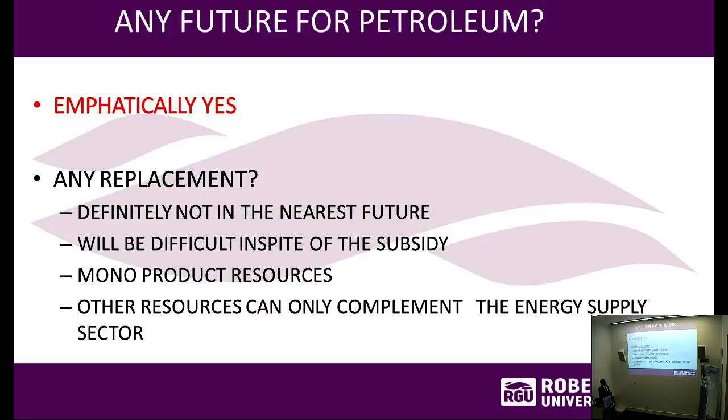Is there any future for petroleum? Honestly, the answer is emphatically yes. It's the only one that has a future - the others are being subsidized. And we still need them, they need to be able to complement, not supplement, those key areas. But the key part is the subsidy may dry out, but more importantly, petroleum actually has a lot of other products that we rely on.

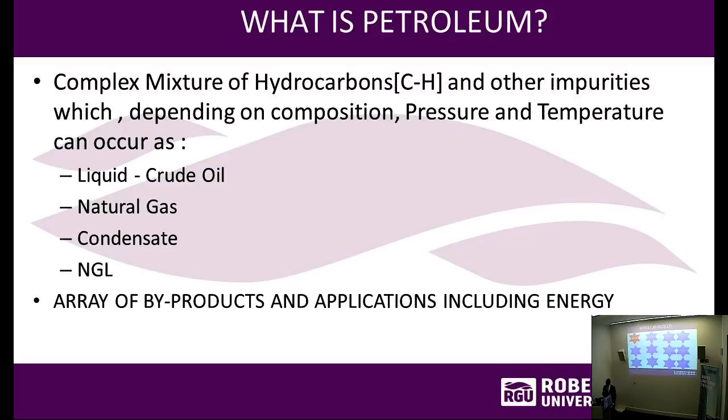I want to start by giving the definition of that. It's actually a complex mixture of hydrocarbons. At the end of the day, it can occur as liquid, which we call crude oil, it can occur as natural gas, and of course you can have condensate, natural gas liquids, and it has an array of byproducts - just too many, at my last count I think there are at least 500. Like I said, literally everything in this room is a byproduct. As we develop and advance, there's a need to be able to enhance what we do, and that's where they're coming from. Energy is just one of them.

When people are condemning petroleum and say we should leave them in the ground, it's only energy they are emphasizing. But they need the roads, they need the clothes they have to wear - they all come from petroleum. So these are some of the challenges we face. Can we cut our face to spite it? I'm not here to talk about politics - we in academia, politicians are elected to take decisions as far as political decisions are concerned. But we have a responsibility to give them informed facts on the basis of which they can make their judgment, and that's one of the areas I'm going to be talking about.

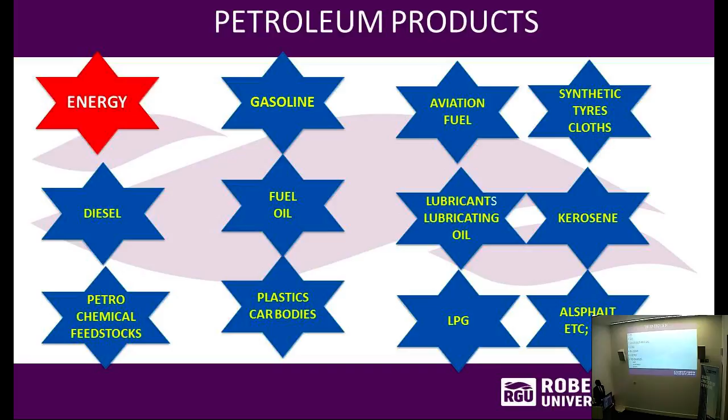So the shale gas is one of that. There's a decline in the North Sea, and you will see later - well, like I said, it's only just 40%. Is there still hope for the North Sea? Definitely yes, but it will take more technology. I'll call the shale gas and oil the low-hanging fruits. Scotland will be in an energy crisis in 10 years' time if we don't handle those low-hanging fruits.

So we will be - the era of cheap oil import or gas import is gone. I can tell you right now, as I'm speaking, every marginal field operator in Nigeria is building a refinery. Nigeria is 140 million - in 10 years' time, Nigeria will be importing oil as well, not exporting. We get most of our LNG from Nigeria right now; we will not have that. So can we take care of the low-hanging fruit?

My answer is yes. At the end of the day, I'm happy that the government has actually come to allowing us to have a public discussion and debate about this. But we in the university have a responsibility to at least show the government what the economic risks are, what the technical risks are, and then they can take decisions - that's not for us to do. So these are some of the key issues that come into play, and there's room for all of these others.

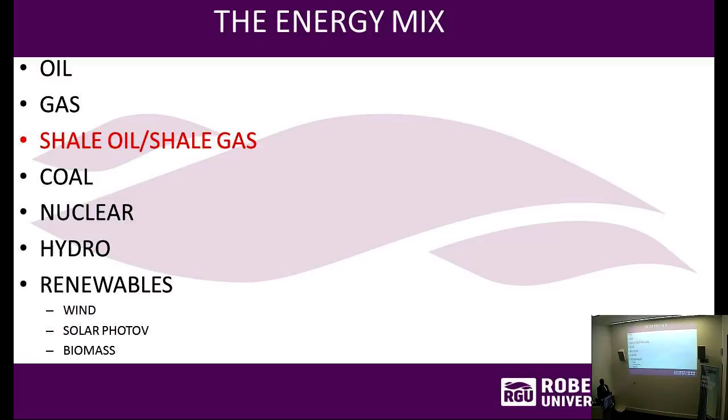The nuclear, we know what it is - I think it's already on its way out in Scotland. And the hydro is going on. The wind, of course, from Scotland's point of view, I think that's been the main kid on the block. And there are others - so these are the energy mix, but these ones here will continue to lead, and I want to show some key examples of that.

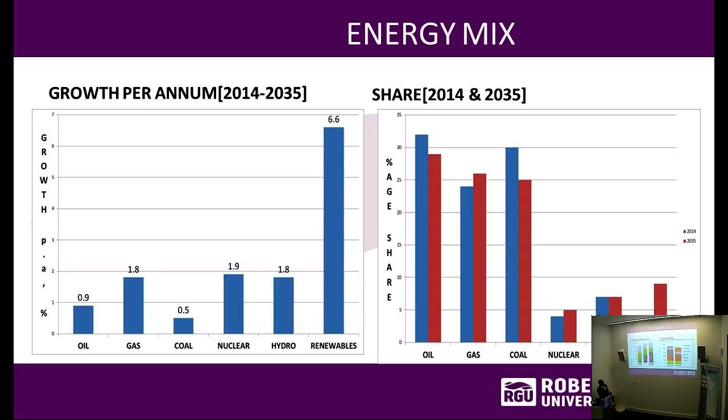And this is just for the 10-year period. Looking at this, there's no doubt there's continuing growth in China and all the areas that are now emerging nations, I like to call them. Generally we are already conserving as far as hydrocarbons are concerned, but you can see that oil and gas together are still going to continue to be leaders. In 10 years' time, there's an overall reduction, and that's part of what is contributing to an increase in the gap between demand and supply. That's a threat to all of us.

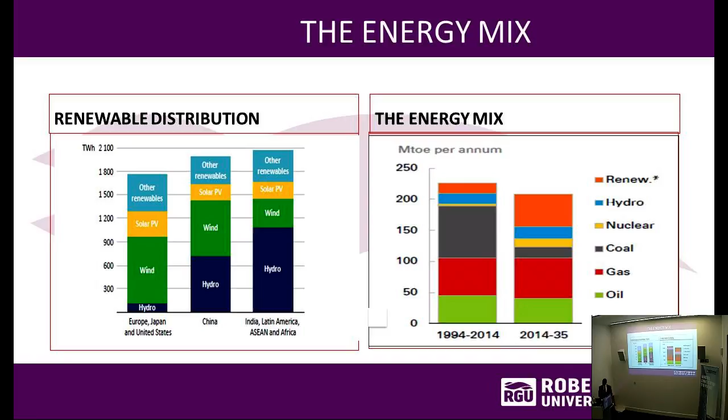Part of the reason is this: these countries, like I said, Nigeria, India, China, even they alone can consume everything that the whole world is producing. If, for example, China is allowed middle-class family having 2 cars, there will be 2 billion cars in China. That will consume everything that we have right now. So we have a serious challenge.

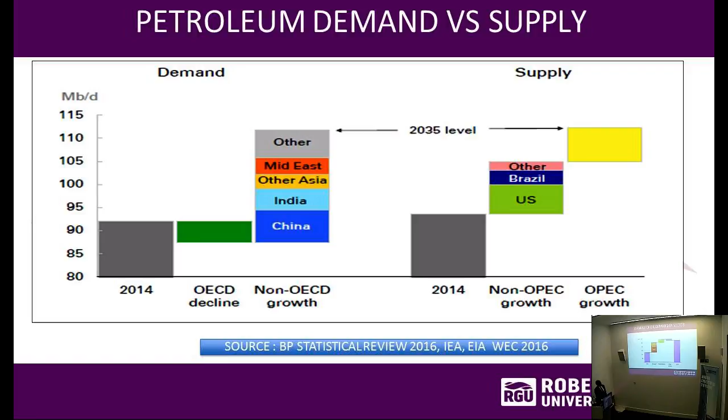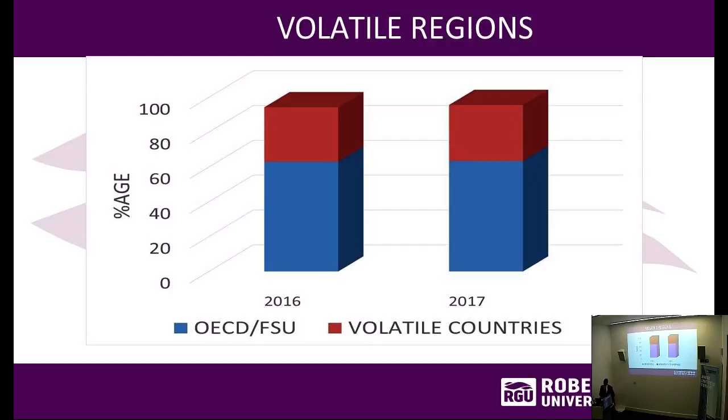I want to just quickly go into this part. At the end of the day, if you look at these scenarios here, I call them volatile countries. They're so unstable, anything can happen. In Nigeria, for example, partly on a daily basis, the export pipeline is blown up. There's war in the Middle East. So if we lose some of that, then that becomes a very serious challenge for us to fill that gap.

But having said that, like I said before, in Nigeria, for example, there has been a loss of export because 40% of Nigerian crude and gas used to go to the US. They are now self-sufficient, and that's what has forced the inward thinking. Last year it's already a policy, and all the marginal field operators are building refineries, and even the old refineries that have been defunct, the government is investing in them. The biggest petrochemical plant as of 2016 is in Nigeria. It's a $10 billion project. And there's also a $20 billion gas pipeline network.

So in 10 years, they might even be importing crude and gas. That's a challenge for all of us. But it's an opportunity for them. But that will eat into the gap within the system.

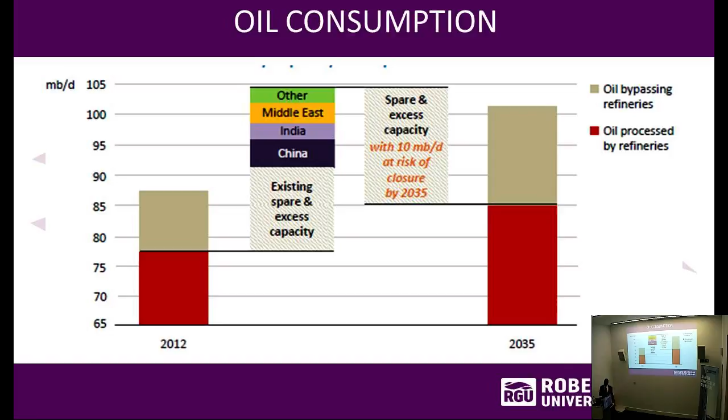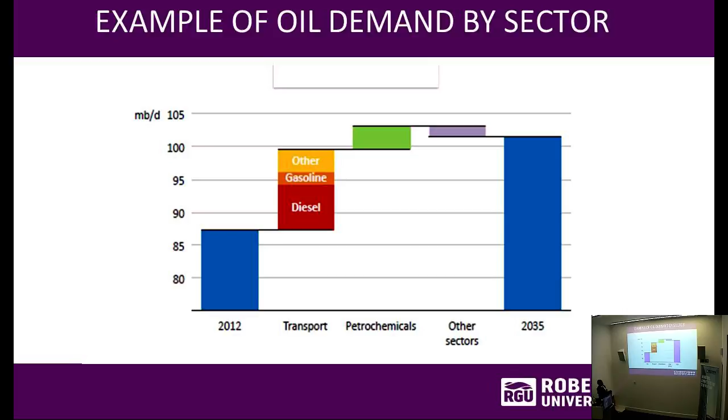So with the refineries increasing and all these countries developing, the 2 countries now with the higher GDP rise are China and India. And it may surprise many of you, and many of the other African countries are following that same process - they are net importers. If we take this a little bit further, we continue to see increase in the gasoline and the diesel and many of the others that we are getting. By 2035, unless some of these actually fill those gaps, that's where the problems come from.

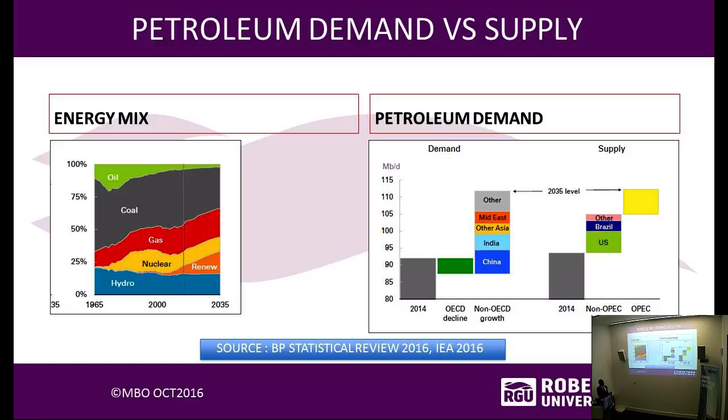I'd like to see more of the renewable, but the trend of the increase is so minimal. The impact right now is difficult. When there's no wind in Scotland, we've got a problem - the wind farms will not survive. Does that mean we shouldn't encourage them? Of course we have to. But we are downgrading the nuclear, while more of that gas is where the opportunities actually come from. And likewise, when it comes to the North Sea.

So in summary on that, it's the demand factors because of the economic growth in China, India, and especially Nigeria. The energy security in the US as well. And of course, like I showed before, the unstable exporting countries like in OPEC. But many of these countries, again, that are exporters now are going to be net importers. So they eat into that same pot. But we are having an increasing amount of mature assets and the low recovery factor of the 40% that I talked about earlier.

And you can see the trends here. The OECD, or the so-called developed countries, are already flattening out, but you can see the growth in all of the others. The GDP, the wealth creation, is part of what is actually some of the reasons behind that. That's where petroleum becomes a very important part of the mix. And we have to deal with that - for security, we have to ensure that these countries also remain stable.

From any angle that we look at it, I brought this deliberately, giving credit to my daughter. She claimed that we create most of the footprint. And these questions are questionable, or these data sets that have been bandied around. This is the greenhouse gas relationship.

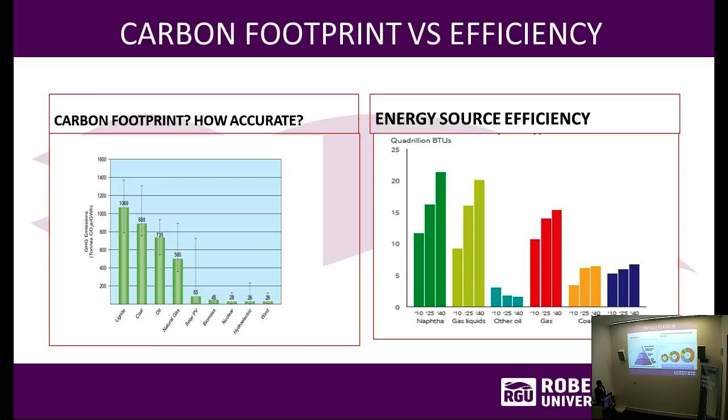But like I said, this is all we've just dealt with. This is what is available. Is this red, as I'm speaking with you, is all we've touched. There's still a huge amount of the shale. There's still a huge amount of other crude oil, heavy, name it. And there's still a huge amount undiscovered, in billions or trillions, if you then look at that.

So it's not going to disappear in no time. And gas has continued to increase in trends, and the consumption is going to continue to increase over time. And the sources are recognized sources that actually have the facts, and these are in relation to the different countries where they apply.

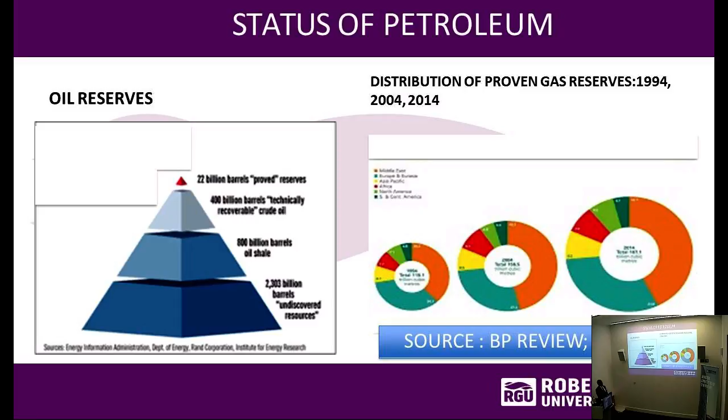So as far as the future for petroleum is concerned, yes, we need to exploit the mature fields. And definitely the emerging frontiers, the Gulf of Guinea, and of course the East African gas systems, and of course shale assets. And heavy oil, we've hardly touched them. I'm happy that one of my colleagues that we used to work together also in BP is sitting at the back there. Again, that's part of his forecast about 4 or 5 years ago.

This is where we are. We've hardly touched the heavy oils. So these are just coming on stream because, again, technically, they are difficult to actually be able to recover. And that's why we need the game-changing technologies. They are needed for us to be able to meet the challenge in future.

But like I said before, we need skilled manpower. And like a psychologist in this university actually said, it's not just having individuals. In this industry, we may need 1 or 2 Socrates, but we need team players. That's why the human factor comes into being. There are different specialties in being able to, again, produce hydrocarbons.

So all of the team players, and it's not just an engineering issue, it's not just, as we call it, technical. There are psychologists that need to be involved. And some of the game-changing technologies, I want to believe that in future we will be actually diving deep water rather than actually fly helicopters. That's one of the areas that I see that the industry will go in order to be able to exploit the deep waters.

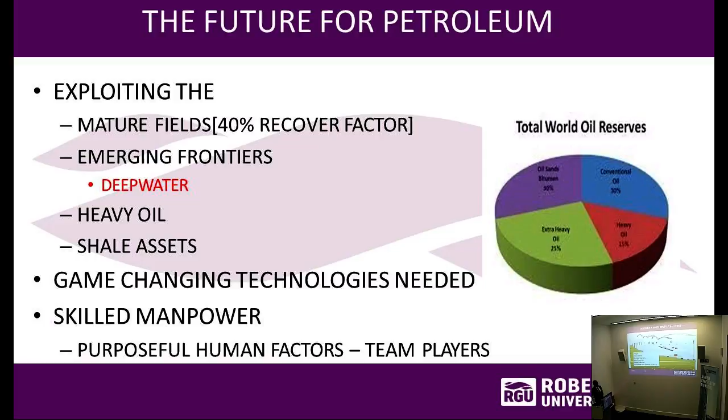And that's where universities actually come in. And these deep waters, we are here right now, and we will continue to explore for more. But in the short term, even improve the recovery in these key areas. So these are some of the challenges.

And I think it's in 1996, actually, about the time that I moved here, Statoil was thinking about let's have everything subsea: produce, process with the refinery. The dream is still there, and that will make things a lot easier for us. It means we can drill, produce, independent of water depth, and buy into military technology. I don't know if you are aware, US and Britain and Russia, they have submarines permanently in the Black Sea or name it. So submarine drilling will be one of the game-changing technologies in future.

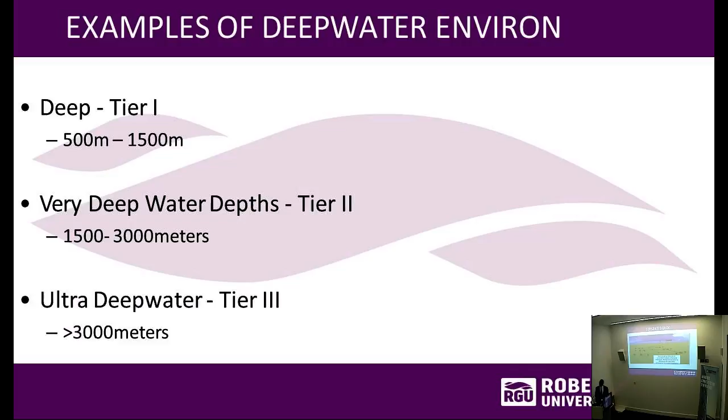I'll pull some quotes which some senior colleagues put up. The International Energy Agency, for example, said back in 2011 that this is the age for gas, and I agree with that. We've seen that increase with our forecast over time. Likewise, the outgoing chairman said Shell and BP are basically, and I'll quote Steve, really gas companies. They have more resources, and this is what Shell wants to be, a gas company eventually.

At the same time, the Energy Institute, to which I also belong, actually forecasted about 3 years ago that 75% of future supply will come from deepwater Gulf of Guinea in Africa, and I buy into that.

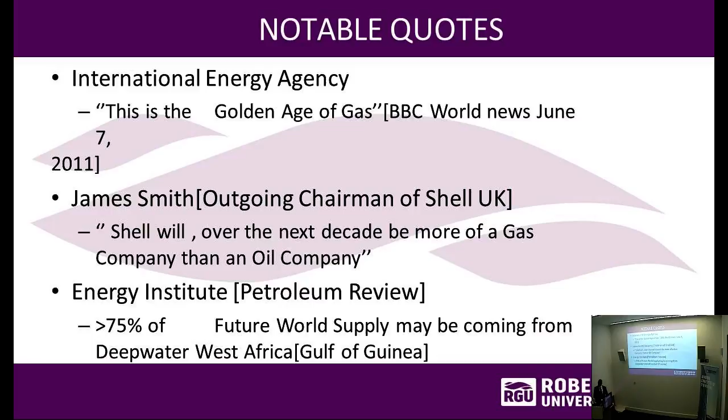But does that mean there's no hope for the UK? I don't think so, I think there's a lot of hope. The mature assets are still very much there. Like I said, it's only 40% we've recovered. Likewise, there's a lot of stranded gas and oil still in the business that can still be tapped into, and the ultra deep water is still there, Atlantic margin and beyond. And the heavy oil, they're hardly touched. Xcite Energy and the rest of them are buying some of the marginal ones, but they are difficult to produce.

But I believe, and I feel passionate about this, that we need to take advantage of the shale assets. They are low-hanging fruits. Part of our duty in the university and elsewhere is to help the government come to the right decision, to know what the economic costs and impacts are and what the technical risks are. Personally, I believe the risks are low, but that needs to be proven.

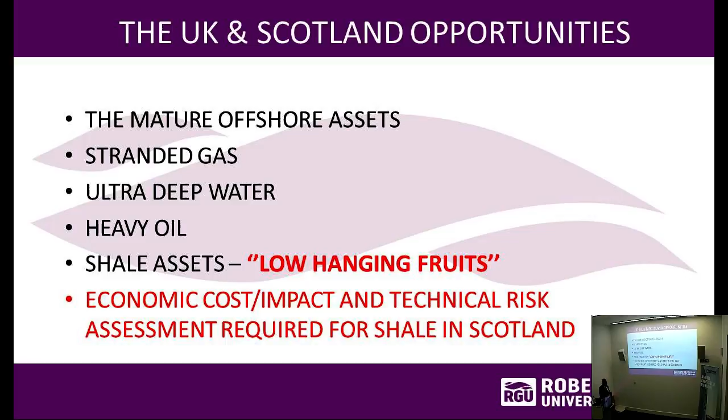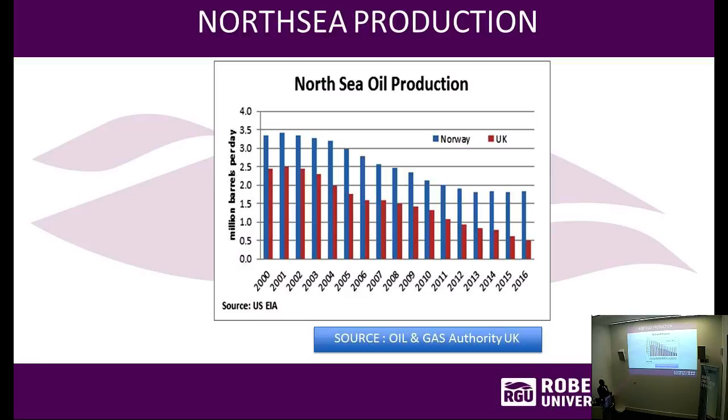And this is where we are in the North Sea. This is the latest from the Oil and Gas Authority. You can see the trend even from the Norwegian side, still much more stable. From the UKCS aspect, this is the situation, so you can see the decline. But I've separated some of the data. The proven and probable are the blue, but the possibles, which are called the potential resources, are also in decline. And if you look at the gas reserves, again, you can see the decline.

But having said that, like I said, these are still representing areas that have just been marginally explored, and it's an opportunity for universities in the UK.

At the moment, Laggan-Tormore by Total is the longest tieback. GoldenEye, again, my good friend at the back there, Craig, is one of the juicy areas that are under development right now. So there are opportunities still there, but there are challenges and technical challenges.

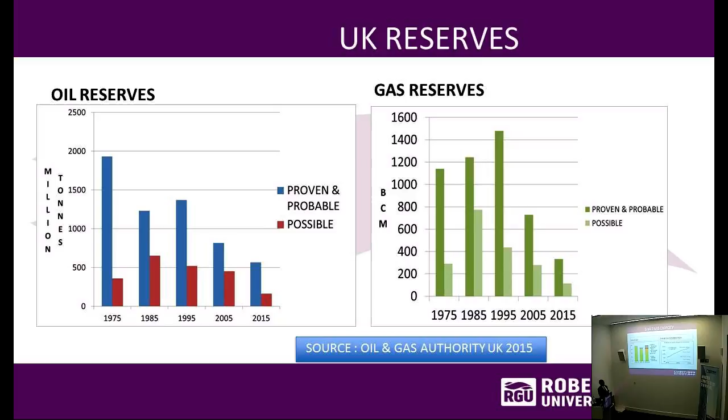And in the North Sea, it's very expensive. For those who may not know, the expense has been going up for quite some time, and globally too. A well is about $80 million. That's high. That's for one well.

So these things don't come cheap, but they can only be reduced by improved technology and by having quality people. I don't mean degree holders, but quality people to be able to deal with them. You can see the trends of the low-hanging fruits, therefore, that at least in the short term, while the game-changing technologies have been developed, my suggestion is that at least we take care of the low-hanging fruits that can meet our short-term needs while we're looking at the game-changing technologies. And there are trends of many such opportunities, both in Europe, even in Scotland, for us to take advantage of.

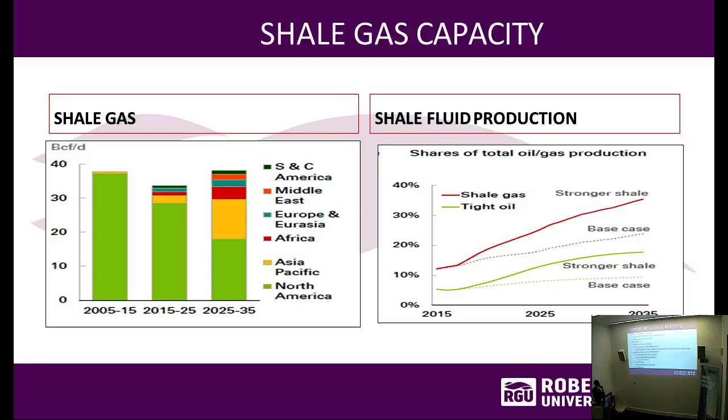So these are what I call the opportunities for the universities, and I will come specifically to RGU in 1 minute. I want to address RGU specifically. Yes, we want to be a model university of the future, but we really need serious surgery to handle our structure to achieve that. So there are opportunities for us, the game-changing technologies.

We are doing a number of researches now, and a number of universities are also doing the same. But should RGU be aiming to be a Russell Group university? For those of you who are footballers, Leicester won the Premiership. I want RGU to be a Leicester among universities, and that means it's a team that must meet. It's not producing one or two Socrates, we have to have a team. And I'm not sure that that is gelling yet within the system.

We must also run as a business for us to actually be able to achieve that, and there are huge opportunities in the emerging nations. RGU, for example, its target market is those areas. But I'll tell you, because of the downturn in economics, the numbers are drying out.

So should we be doing this distance learning stuff? It's no longer sustainable, and I can tell you those countries are rebranding. So does that mean we should reach out to them?

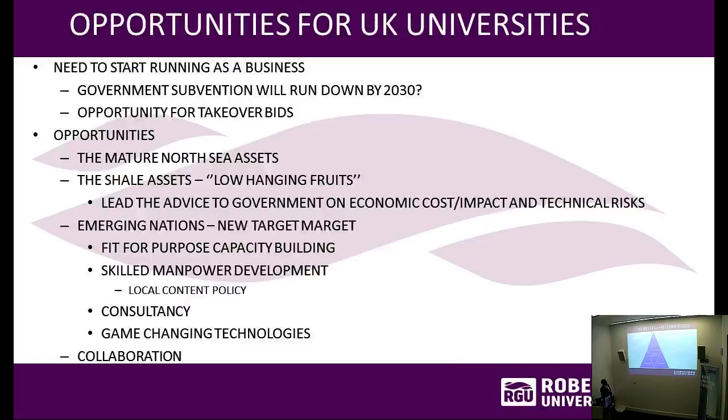I had the privilege of following what we used to call the sandwich program: government, industry, and academia. The government provided the framework, and industry contributed. I recall it was 10p per barrel of oil produced in Nigeria, and the government gave tax relief for that. Students actually spent 6 months in industry and 6 months back in the unit. Secondment from industry increases collaboration.

It was a British formula. Why did we abandon it? We have students now with degrees. With due respect, many of the students - and with due respect to the students here - I think we're giving them what they want. We need to be giving them what they need. We need skilled manpower for the next 10 years, and we need to make that difference as a university.

Part of our job for success as a business, we must increase our consultancy level. In the US, universities farm into oil fields and use that as part of the platform. Why can't we do that here? I can tell you right now, universities in Nigeria are doing the same, farming into assets where they can also collaborate.

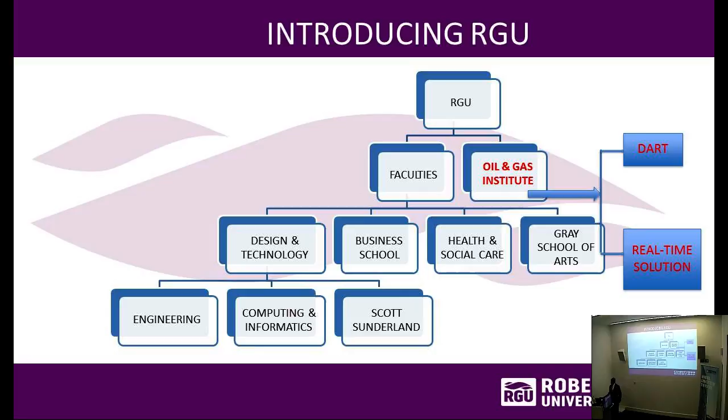And trust me, like my old man used to say, when you create wealth, you will always be rich. RGU must try to create wealth, must try to increase its presence in its target market through collaboration. I think that's the kind of situation I would like to see.

And the time for us to start is now. I believe RGU has started well, especially with the Institute. I think we can build on that platform. Like I said in the introduction...

Universities in 10 years' time that don't get their acts together will be taken over. City University, as I'm speaking with you, on the 1st of September is already being taken over by University of London.

This university has what it takes. It's had a long relationship with industry, has what it takes to be able to move things to the next level.

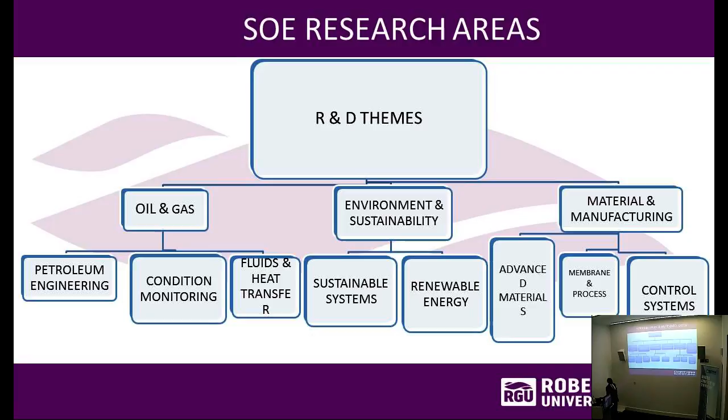And yes, we've been doing a number of researches, and I want to congratulate my colleagues that we've covered a number of areas. But many of these, we have IPs in them. They need to be translated into wealth, again, licensed to industry to support them. The things we are doing now are a scratch of the surface, but it's a good platform for us to take things to the next level.

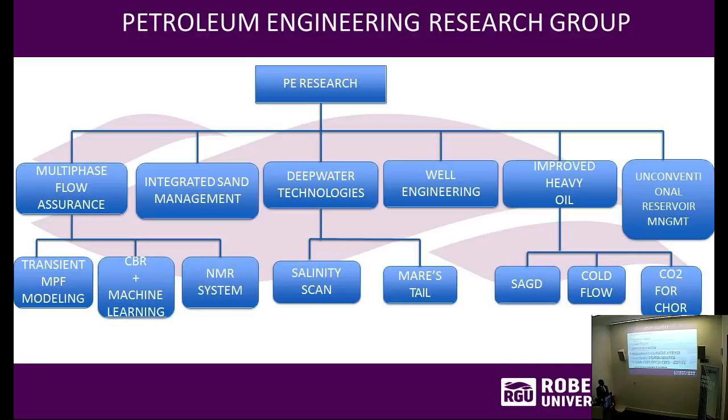Because these are the industry challenges. There's a downturn, we want to reduce operational cost. So we want to make our lifting costs as low as possible.

And we are already contributing to real-time diagnosis and solutions, and I'll use two seconds to showcase one of the software we have, which is a complement of these integrated research outputs that form some of that software support. And that is helping us support industry in being proactive rather than reactive.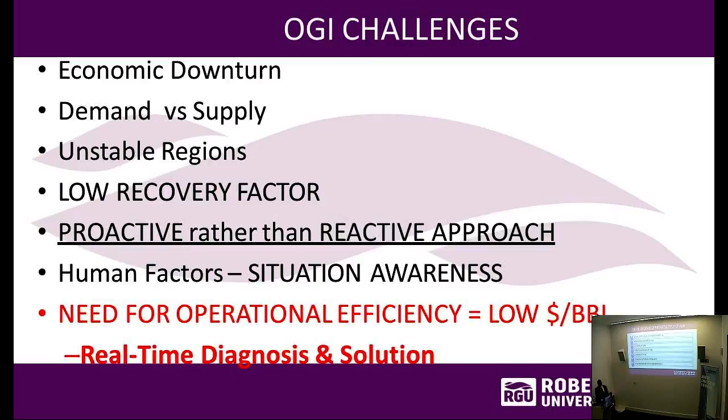And for the benefit of those who don't know about the industry, we have what I call the supply chain. We explore, then we drill to find the oil, we complete, we test, we produce, and then, like some parts of the North Sea now, we decommission.

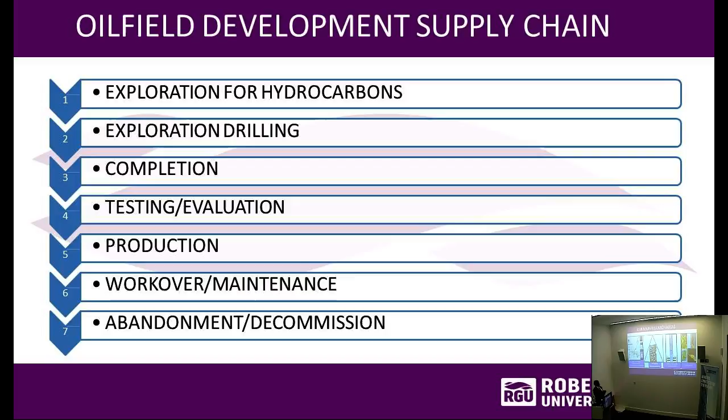That's why in the petroleum engineering group we cover a number of key areas: sand management, well engineering, subsurface, and trying to go into real time, because the challenges are more, especially when it comes to deep water. Each of these areas needs to be able to connect.

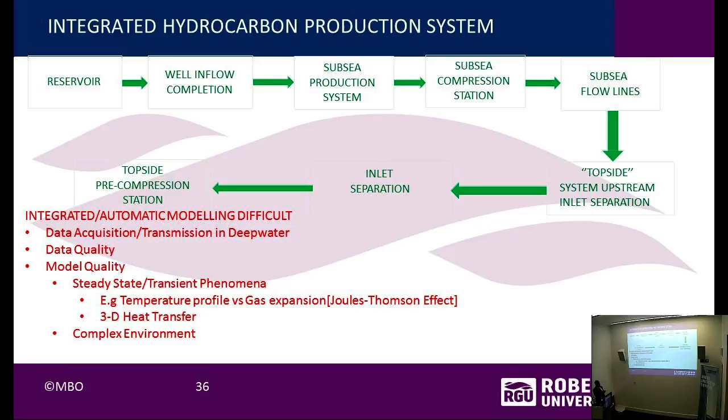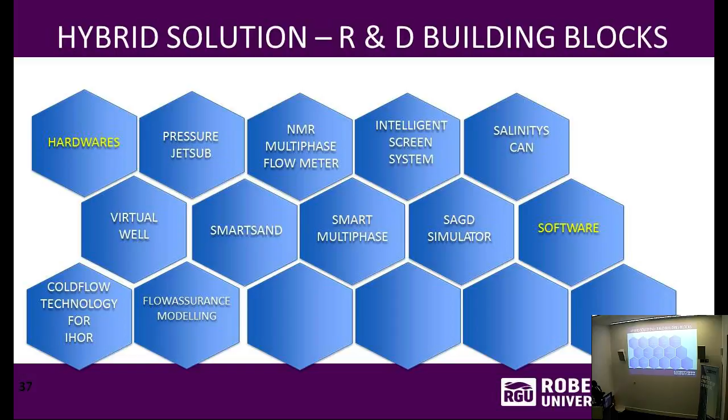If this drops out, the whole card will fall. It's a domino. There must be success in each of these, and that's why we see the connection between our system.

In our own little way, I think we are one of the first to be able to do this, we can actually decide when a well will produce, and when, and so on. We have the software to support the industry in doing that.

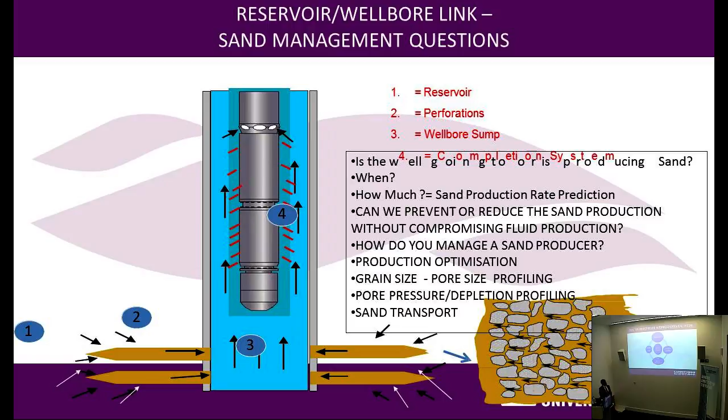On a bigger scale, we recognize there will be some sensors in certain parts of some of these tiebacks. Just to give an example, some of these tiebacks, like what Total has in Angola, is 240 kilometers. Nobody can afford to put sensors across all of those.

But knowing what happens inside the well, inside the pipeline, and diagnosing how and when problems will happen can actually help prevent them. That's one of the things we've been doing. But we want to take it to the next level where the modeling can link with the sensor and with machine learning, along with our School of Computing, case-based reasoning and pattern recognition supported by people, to enable the industry to work better.

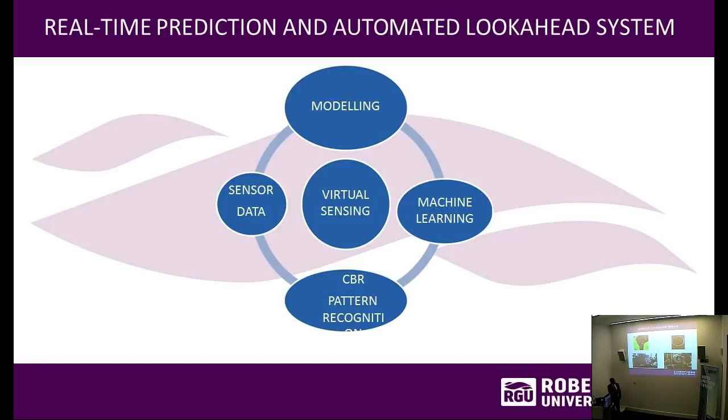So I want to end with a few areas where I see opportunities for RGU, where RGU needs to move further. I think we should continue to build on applied research, but we have to intensify our collaboration with industry, and provide the infrastructure for staff. We need to invest heavily—we are short on infrastructure for personnel to be able to work.

It is true that we can marshal staff, but I think there's a disconnect. The communication aspect is a difficult aspect we need to work with. Like our target market, we need to engage with countries like Nigeria and most emerging countries, but I don't believe the current strategy is sustainable. We need to invest in a virtual campus type of scenario, collaborating with local institutions.

At one point, according to my statistics, we had 1,750 Nigerians doing MSc programs at RGU. I don't know what the number is now, but that will never happen again. They are rebranding too.

But they still need the support, still need to be engaged in terms of utilizing game-changing technologies, so I think we need to rethink how we do that. I think the virtual campus will help—collaborating in research, sharing staff to build their own expertise, is what's going to work better.

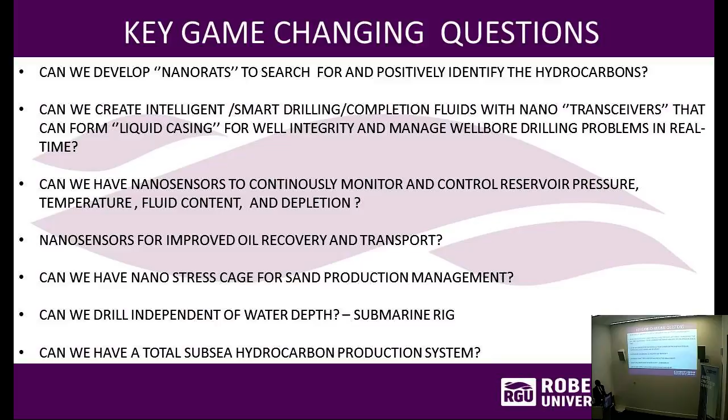So these are some of the questions I'm beginning to ask, and in some of those areas we are no longer just dreaming about them. By Q1 of 2017, I think we are putting some proposals in place to be able to at least start with some of those pilot studies.

I want to end with this, and I'm sorry if I've exceeded the time a little. I still believe, and strongly so, that globally there's still a lot of future for oil and gas - a massive amount still out there. We've only explored less than 10% of the earth's crust, and out of that 10%, it's only 40% we've been able to get.

I still believe that shale and offshore assets will continue to form the cornerstone of future supplies in Scotland and globally. But we need to act fast, especially in Scotland.

I think England is already allowing for some element of that, and the Institute of Materials, Minerals and Mining, of which I'm a fellow, has actually done some risk assessment which forms part of the decision-making process.

Like I said, we are not politicians, but we can help in Scotland, through the university, to support the government, even as part of these public consultations going on, to give our opinion and help the government achieve the objective.

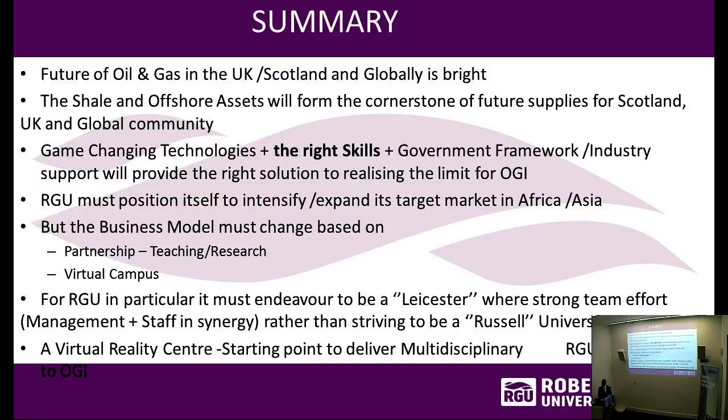I hope I've managed to convince some of you. I'm still arguing with my daughter - she believes that this industry, yeah, they need us, but that we need to plow the money into renewables. And I want to thank you for listening.